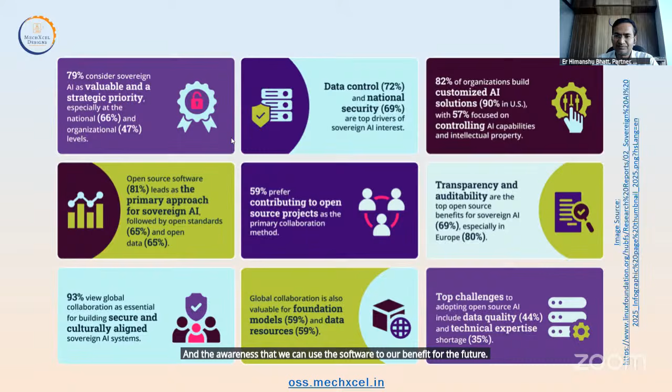So if all things are good about open source, why are we not using open source in engineering? What are the struggles? Dr. APJ Abdul Kalam, in his 2010 speech on the Vision for Free Software Movement, had highlighted the importance of free software. But it has not been widely used even today, for three reasons, which I think are as follows.

The first reason is limited awareness, because many capable software tools remain underutilized due to lack of visibility. Commercial software companies have business development managers and marketing teams who keep calling engineering institutions and industries, selling their software, making demonstrations, etc. For open source software, there is nobody doing that because it is community software - you have to find your own required tool.

That's awareness. The second reason is the learning curve - the initial setup and workflow of the software, how it is to be operated, remains a challenge for beginners. And support is not centralized. With commercial software, you have a sales team that has given you commitments - you can call them 24 by 7, say 'this is not working, fix it,' and they have to respond. With open source, you have the source code, and you are responsible for how you manage your software.

Thank you very much, Himanshu, for the introduction. Today I will show you how FreeCAD can be used for your design process in mechanical engineering. More specifically, this is how the product development process can look like in engineering usually.

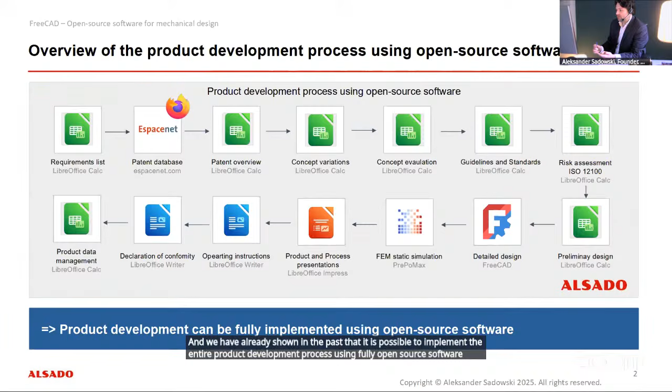We have already shown in the past that it is possible to implement the entire product development process using fully open source software like LibreOffice, FreeCAD, PrePoMax, and many others. But today we will focus on the detailed design part of this whole process, and we will show how you can go from the sketch to the 3D printed prototype, all in open source software, mainly FreeCAD.

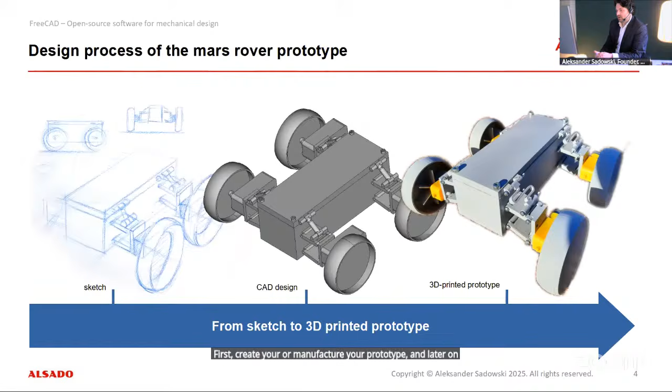Whenever you design your machine, your robot, or any other product, you create your sketches, then you create your CAD design, and then you first manufacture your prototype, and later on you manufacture your product in series. Today we will take a look at what FreeCAD is.

FreeCAD is a complete 3D CAD software that small to medium-sized enterprises in manufacturing can integrate today, and they can use that for their design process and to prepare all their parts and assemblies for manufacturing.

With FreeCAD, you have got a universal interface, which means that it supports all the industry standard formats, which are STEP, DXF, STL, 3MF, or PDF. STEP would be used for 3D CAD files. DXF would much rather be used for 2D files, which are then loaded by CNC laser cutting machines or water cutting machines. STL and 3MF are formats for 3D printing.

Just recently, the 3MF format was introduced, which is an improvement on STL, but most people still know about STL.

FreeCAD is built up in a kind of framework where it is modular in its nature, and this was inspired by CATIA V5 back then when the FreeCAD project was started. The FreeCAD project was started around 2000, so it's nearly over 25 years old already. Over all of those years, FreeCAD has developed more and more, and I would say like 5 to 10 years ago, it crossed a threshold where it is actually usable for productive work.

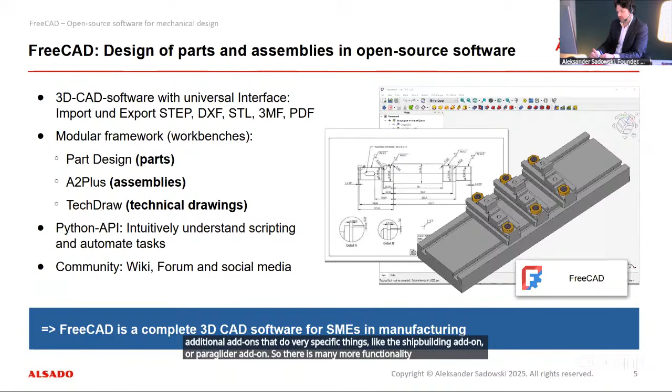And on top of that, because FreeCAD is open source software, and not just any open source software, it's actually the most popular open-source CAD software worldwide. So it has got a big community where we can go and talk to people, get help, and get inspiration from other people's projects through the wiki, the forum, or social media channels. All of this makes FreeCAD a complete 3D CAD software which is also extendable. Through the add-on manager, we can access many additional add-ons that do very specific things, like the shipbuilding add-on or paraglider add-on. So there is much more functionality we can get by downloading additional add-ons.

Now let's take a look at the graphical user interface first so that everyone understands what we are looking at. In this example, this was a CAD model of an electric vehicle platform, which we used for crash simulations. But in this case, we will use this example to show what the most important parts of the graphical user interface are.

So in the middle, on the right, you've got your 3D view, which you can rotate, zoom in, zoom out, all the things you know from other CAD software. To the left of that, we've got the document tree, which lists in a hierarchy all of the objects inside our document. These could be different parts, different features, and stuff like that. We've got our workbench selector where we can switch between different workbenches. For people that know CATIA V5, this is pretty similar to how CATIA V5 behaves. And we've got our toolbars on top, where depending on which workbench is selected, the functions there will change. So when we have the part design workbench selected, the toolbars change to reflect and show only the functions from the part design workbench.

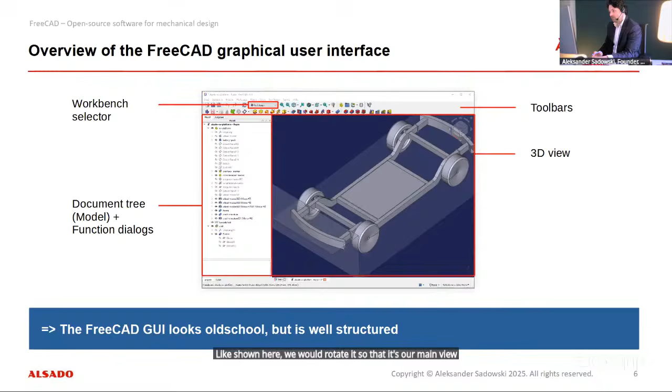In this case I just used a standard one and derived this part as a technical drawing. First we would rotate our part in the 3D view, like we've seen previously, so that it's the main view we want on our drawing. We then go to the drawing and place a projection group on the page we've already created.

After we have placed all the views that we need, we add dimensions like distance, diameter, or radius, and also tolerances like plus-minus for each dimension, or separately as tolerances for the entire part, which we would do as a page annotation.

After that, we would add edge and surface annotations like roughness, edge break, and many other annotations like defining material treatment, and much more. You can do all of that in FreeCAD with edge annotations and surface annotations.

We previously developed these so that people could import them into FreeCAD, because two versions before they weren't available. But in the current version, all of these have been fully integrated into the TechDraw workbench.

Once we have created our technical drawing, we can export it as a PDF file so that others don't need FreeCAD to open it. We can export it as a PDF and then send it to a manufacturer, or we can manufacture it in-house.

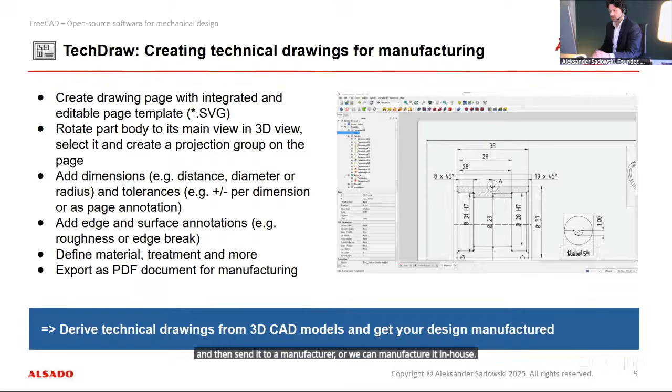For all the people that want to first create their prototypes before sending it out to big manufacturing, we can export a STL file from FreeCAD from our bodies, which represent our parts. We import those parts into a different open source software called Prusa Slicer. In Prusa Slicer, we can import all of our parts from FreeCAD, arrange them on the build plate, and set all the printing settings like layer height, how fast the printer moves, and other settings. We can slice that and generate the G-code that we can then use to transfer it to our printer.

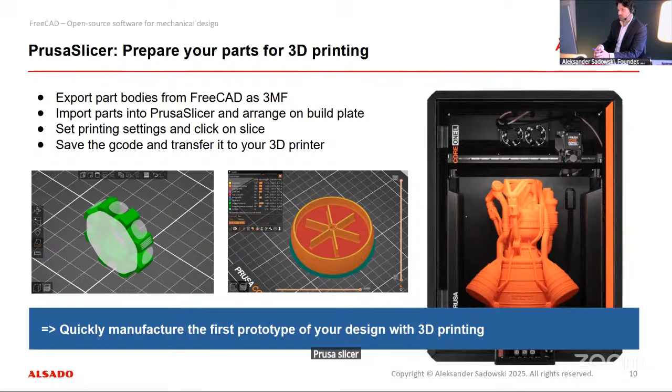In this case we have also shown the Prusa 3D printer because they developed the Prusa Slicer, but you don't need a Prusa 3D printer to use it. You can use the Prusa Slicer with pretty much any 3D printer.

Now we will show you a live demo of how we can create one of those parts, going from the finished technical drawing back to the part, which in this case would be the upper wishbone of our Mars rover that we introduced in the beginning. So let me take over and go to FreeCAD.

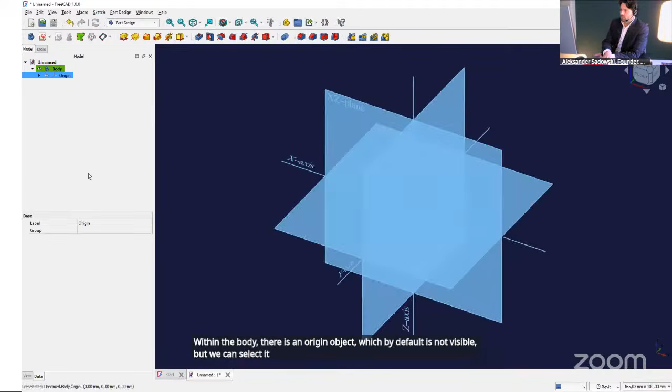This is the FreeCAD user interface, and we are greeted with the start screen where we can create files and open files. In this case, I will select the parametric part, and automatically a new file has been created, and within it a new body has been placed. Within the body, there is an origin object which by default is not visible, but we can select it and press the spacebar to see all the planes and axes we need. So this is the space where we will create our part.

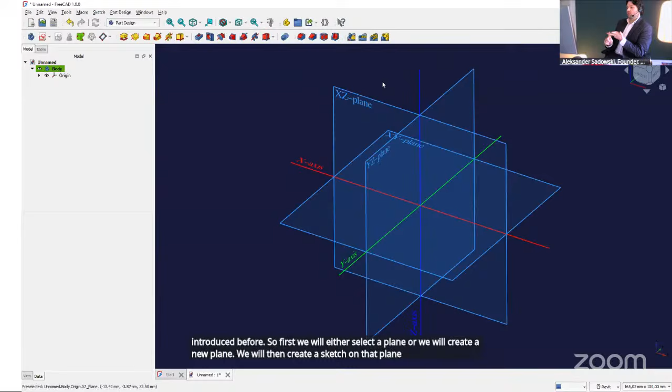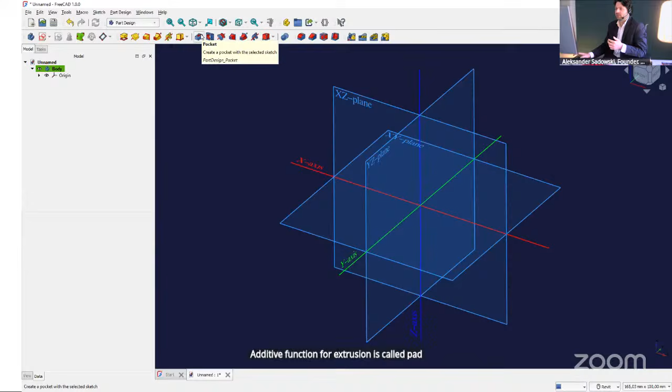Let's start with our workflow that we introduced before. First we will either select a plane or create a new plane. We will then create a sketch on that plane, and use that sketch to create a 3D feature like extruding or revolving. Extruding or revolving can be done either additively or subtractively. In FreeCAD, the additive function for extrusion is called Pad, and the subtractive is called Pocket. You can identify them by their icon or symbol color. All the yellow-red ones on the left are additive, and all the blue-red ones are subtractive 3D features.

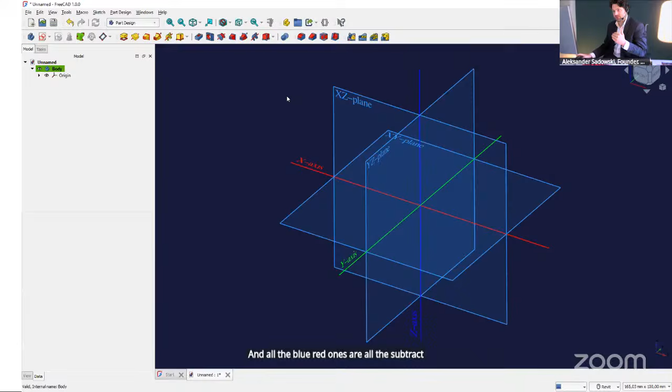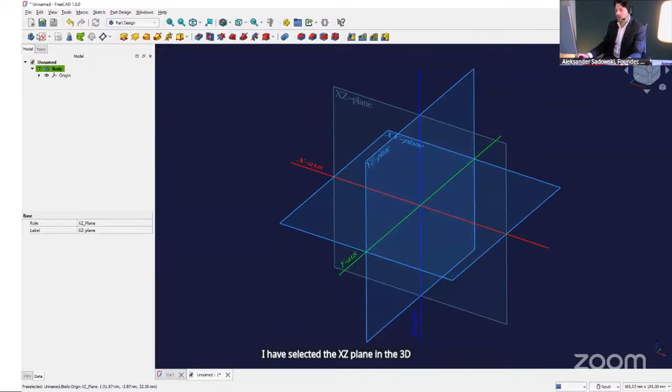So let's start out with our part. We will first create our first cross section on an existing XZ plane from our coordinate system. I have selected the XZ plane in the 3D view and create a new sketch, and FreeCAD automatically rotates the view and constrains all of our input so that the sketch is always done in this plane.

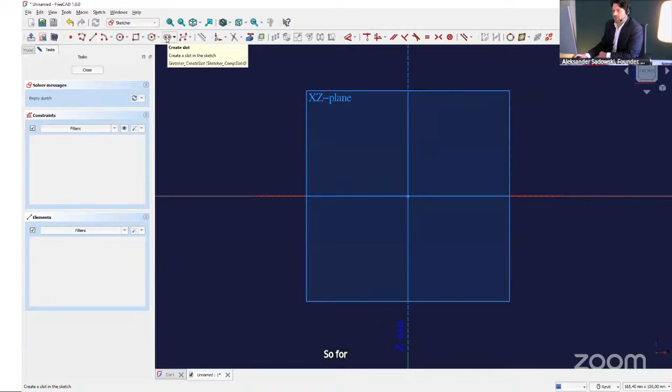For this part, we have to create a cross section of it, and I know that we need to create a slot. So now with 3 clicks I have created this whole slot, and now I will constrain it in the sketcher. I will first constrain these 2 points to be symmetric to the coordinate system axes.

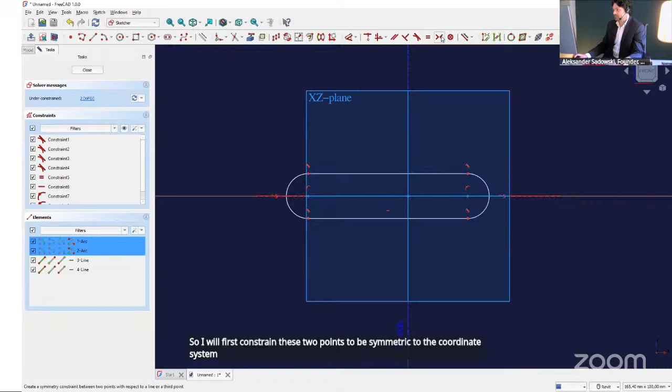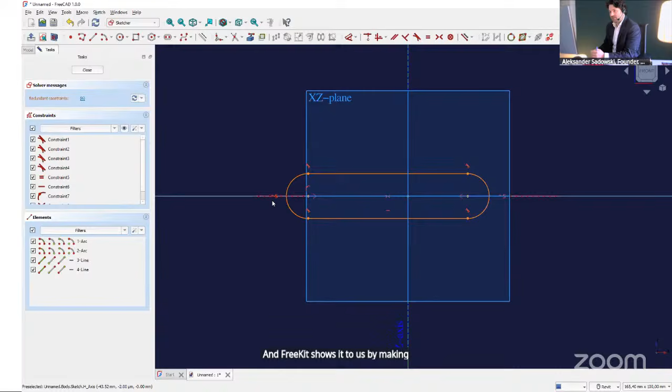Now the sketch turned orange, which means it is over-constrained or there are redundant constraints. This can happen when, for example, whenever we create geometry, FreeCAD creates some constraints automatically, and when we later add new constraints, the previous ones can become redundant. FreeCAD shows this by making the lines orange. To fix that, in the solver messages we can see it says redundant constraints, with a number, in this case 6. I click on that number and FreeCAD automatically selects the redundant constraint. I now just press delete on my keyboard and it deletes the redundant constraints.

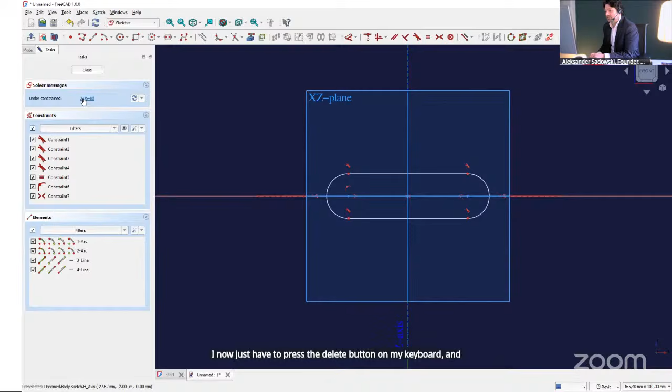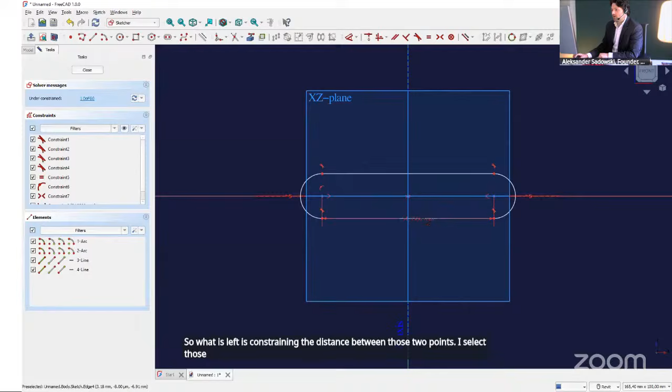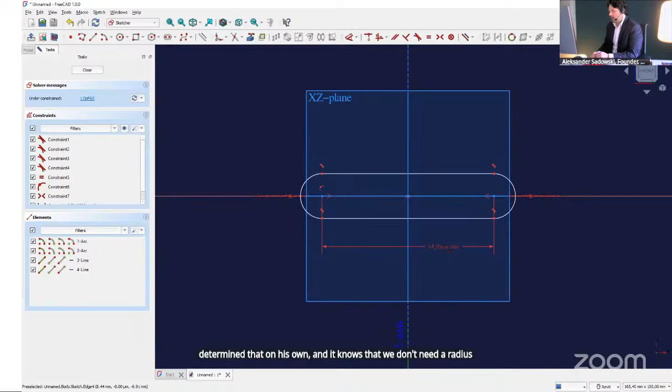Now we have finally placed the symmetric constraint, so whenever I move the right point, the left point also moves. What's left is constraining the distance between those 2 points. I select those, click on the dimension tool, which in the recent version automatically knows what type of dimension we need. Previously, you had to explicitly tell FreeCAD whether you wanted diameter, radius, length, or whatever. In this version, FreeCAD can determine that on its own, and it knows we don't need a radius or arc or anything else — we need a distance. So we will define that as 20 millimeters.

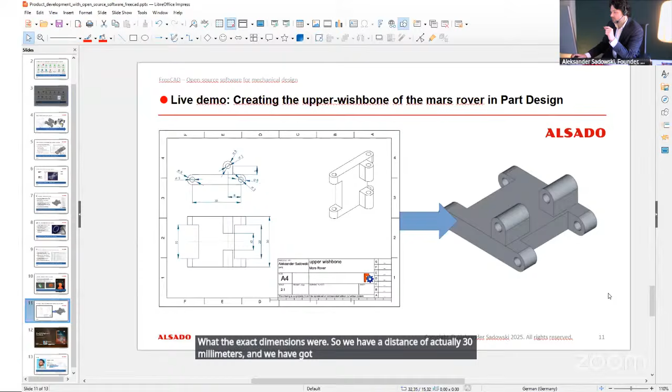We will also define the radius to be 6 millimeters. Let me just go back to the drawing because I'm not sure what the exact dimensions were. So we have a distance of actually 30 millimeters, and we have got a diameter. Let me zoom that in for you so we can see better.

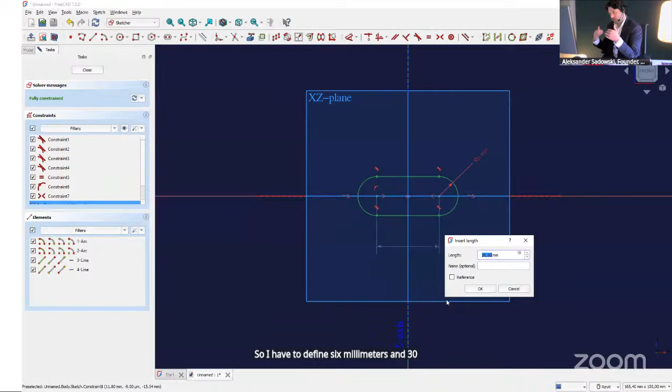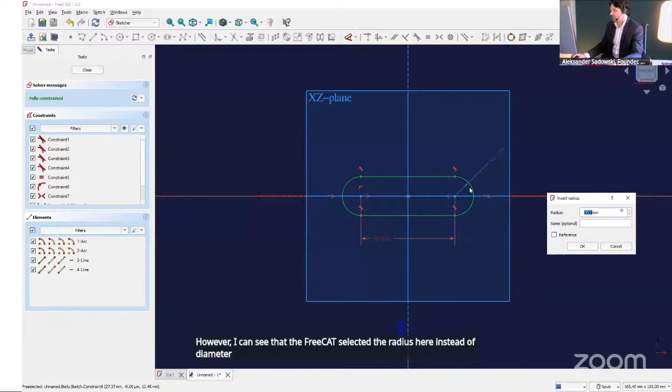We are trying to reproduce this cross section. So I have to define 6 millimeters and 30. Because FreeCAD is fully parametric, whenever I have set a parameter, we can always go back and change it later on. Now our drawing should be ready. However, I can see that FreeCAD selected the radius because it's not a full circle, so I will define the radius as 3 millimeters here, so it's correct now.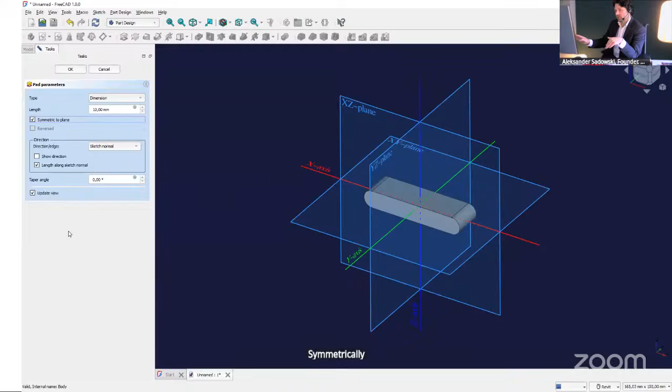I close the sketch, and having the sketch selected still, I click on Pad, which creates an additive extrusion. In this case, I want it to go symmetrically into both directions, and I want it to be over a width of also 30 millimeters, so I enter 30 millimeter as a dimension. I click OK, and we have got our first solid object created in FreeCAD.

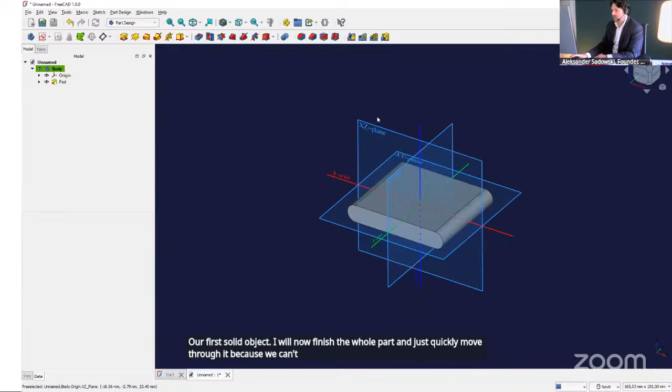This is not our final part, but this is our first solid object. I will now finish the whole part and just quickly move through it, because we can't go that much in depth about how this part is created.

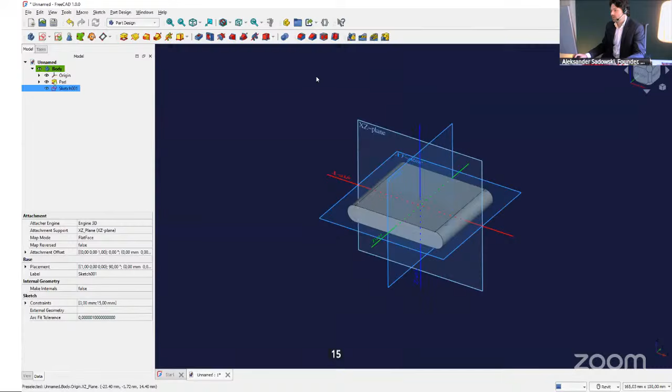So I will just do the steps and not explain every one of those. We create our hole here, which we will also constrain to be 15. Close it, and then we can create this through all symmetric, okay. Then we can mirror this onto the other side, click OK, and now we have got these parts ready.

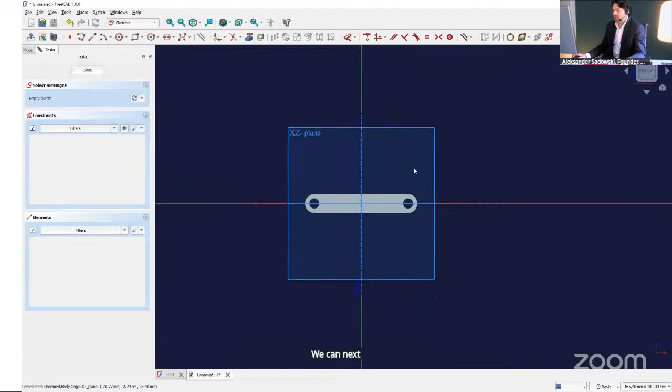We can next create the XZ plane, and here we need to define this one. So I have now defined this line as a construction line, so it will not be part of the geometry.

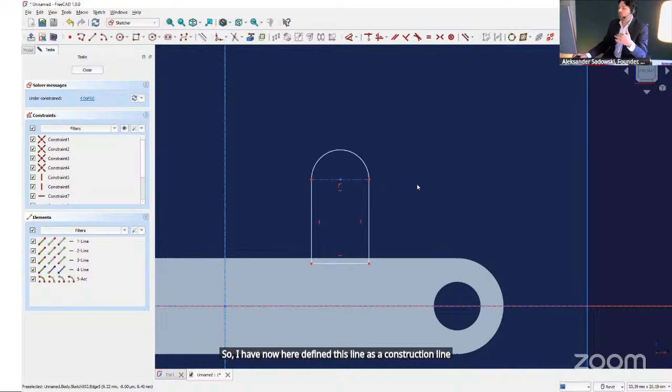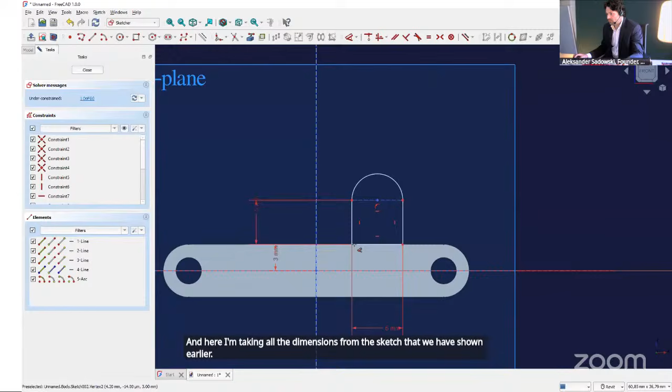And here I'm taking all the dimensions from the sketch that we have shown earlier. So this should be 4.

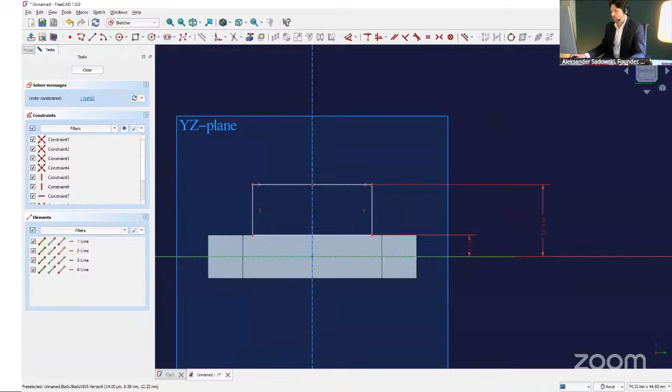And whenever we are not sure what constraints are missing, we can just pick any part and drag it to see, okay, I need to still constrain the dimensions as width of this rectangle here.

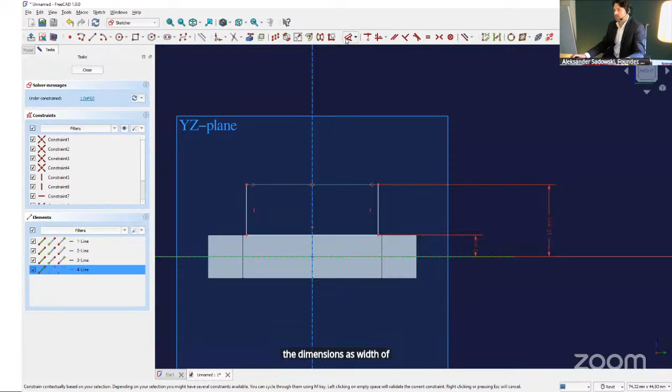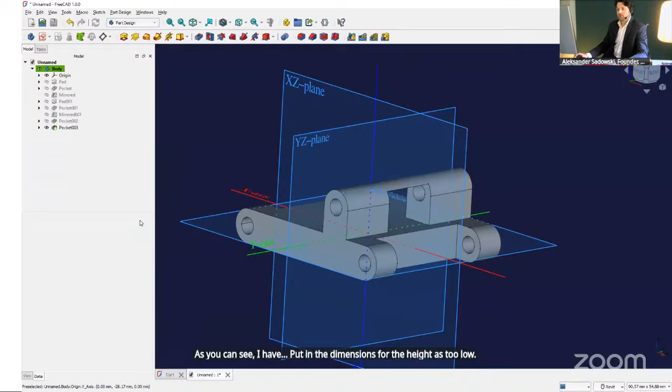As you can see, I have put in the dimensions for the height as too low, and we can always correct these things. I can go back into the last feature that I've done, take a look at the sketch. With a double click, I can open it, define a different height here, close it again, and then our part is fixed.

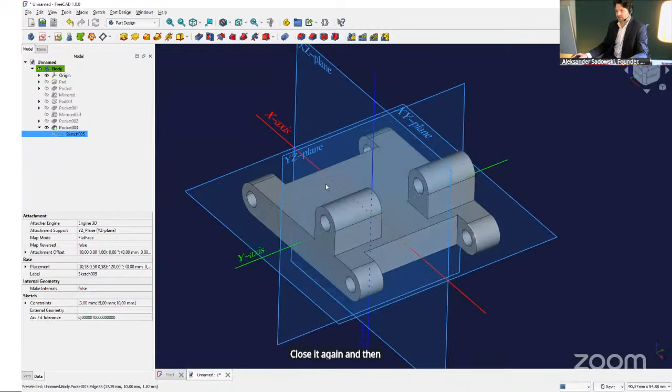Now, maybe we don't need the planes anymore. I can hide them, and we have got our part finished. So this would be our upper wishbone of our Mars rover. And this would be how you would create a part in FreeCAD.

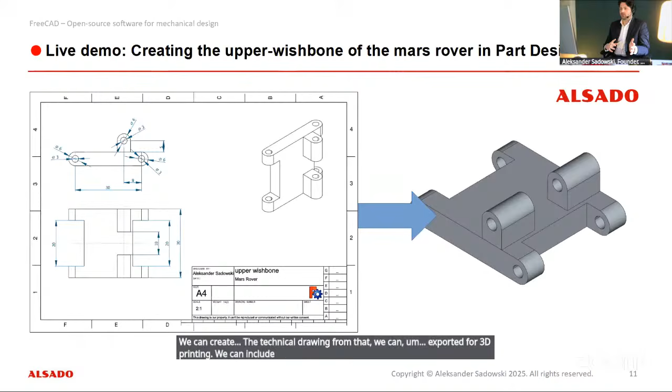And then we can create the technical drawing from that. We can export it for 3D printing. We can include that into the top level assembly and other things like that.

And if you want to learn how you can create this whole Mars rover from scratch in FreeCAD, we have recently published a book with Prusa Research, who is a manufacturer of 3D printers. In this collaboration, we tried to help beginners go from turning their idea that they have put in their head into getting it onto a sketch, like something that is tangible, and from there into a 3D printable prototype. And I think that is very important because it allows us to quickly move through development cycles.

Thanks to 3D printing, we can much faster develop our products because we can faster assess any problems with it, and we can print our first prototype, take a look at it, hold it in our hands and see all the problems, go back to FreeCAD, do the changes, and then print it out again. This is how you can quickly move forward in developing your new products.